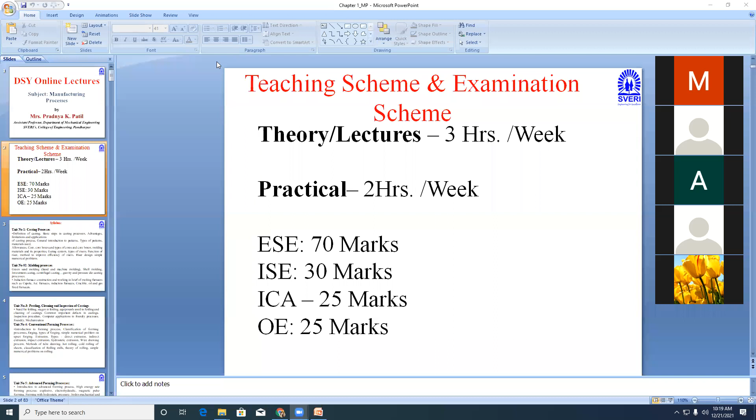Next, we will move towards our subject. First, our subject name is manufacturing processes. You have already learned about manufacturing processes in your diploma second year. Have you learned this subject in diploma second year? Some yes, basic part ma'am. Okay, so you are aware about manufacturing processes.

In this subject we have to cover 6 chapters total. Our teaching scheme and examination scheme will be theory 3 hours per week lecture, and practical 2 hours per week.

And ESE, what is meant by ESE? ESE is nothing but end semester examination. That will be 50 marks, but that 50 marks will be converted into 70 marks in online exams. If your exam is online, your paper will be 50 marks, converted into 70 marks. So how many marks will the examination be? 70 marks.

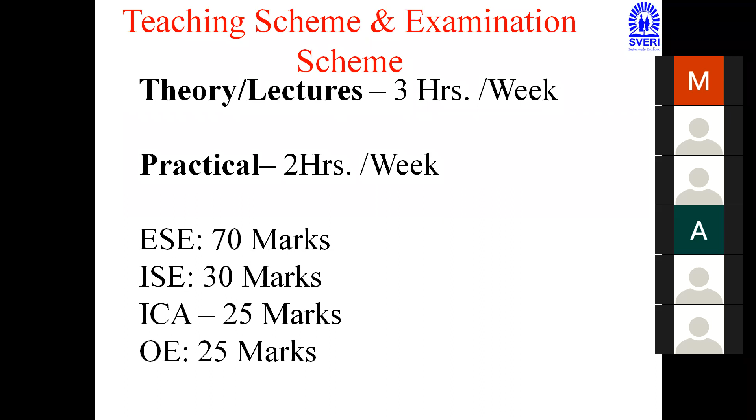Next is our syllabus. We have to cover 6 units total. First unit is casting process. Second unit is molding process.

In the first unit, casting process, we have to see the definition of casting. What is the actual definition of casting? What are the steps in the casting process? What are the basic steps required for that casting process? We have to learn that also.

And what are the advantages, disadvantages or limitations and applications of that casting process? So first we learn casting, next the basic steps of how to do that process, and then the advantages, limitations and applications of the casting process.

Next, general introduction to pattern. Have you heard the word pattern in second year? Have you learned what is meant by an actual pattern? We will learn about the types of patterns, the types of material used for pattern, what is meant by allowances, what is meant by core, what is meant by core boxes, and the types of core and core boxes in the casting process.

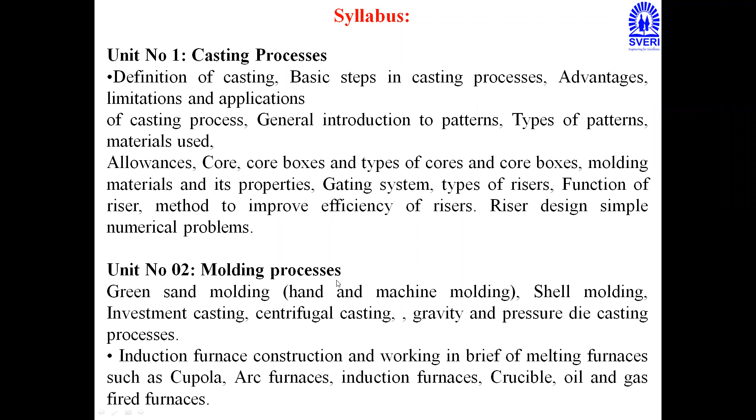Next part is unit number 3, fettling, cleaning and inspection of casting. What is meant by fettling? We have to remove the unwanted part of casting. That is nothing but fettling.

Cleaning, you know what is meant by cleaning. And inspection, we have to inspect that object or product in all aspects, that is specification, diameter, and all finishing. In every aspect, what you have to do is inspection.

So what is unit number 3? Fettling, cleaning and inspection of the casting. Next, in that, need for fettling. What is the requirement or need for fettling? Stages or steps in fettling.

Equipments used in fettling and cleaning of the casting. Which equipments are used in fettling and cleaning of castings? We have to see this in unit number 3.

Common important defects in casting - this is a very important part in unit number 3. Defects in casting, and inspection procedure. What is the inspection procedure?

Computer application in foundry process. What are the applications in foundry process? Computer applications in foundry processes - what fettling and cleaning computer applications exist in foundry processes, and how does mechanization work? This is what we have to see.

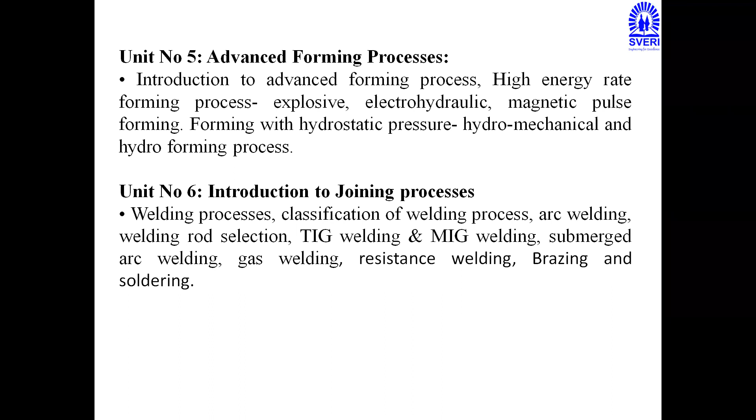Yes ma'am. Okay, next is internal continuous assessment.

Next part is internal continuous assessment, ICA. So in that we have to see 8 experiments, total 8 experiments are there.

So first is design of pattern and core for a simple component.

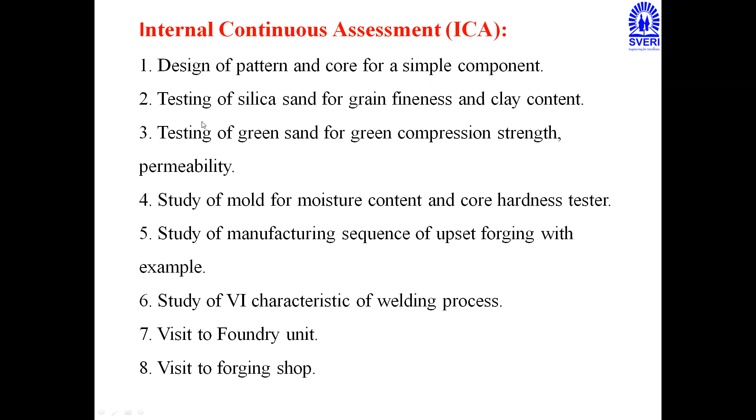Next part is the textbook. Please take a screenshot of the textbooks. I will give notes, but if anyone wants extra material, you have to learn from these textbooks. Please take the screenshot of these textbooks or write down the textbook names.

Heine, Lopar, Rosenthal - Principle of Metal Casting; N.D. Titov - Foundry Practice; P.L. Jain - Principles of Foundry Technology; P.N. Rao - Manufacturing Technology Foundry, Forming and Welding; and Production Technology by P.C. Sharma. These 5 textbooks are there in our library.

So if you want, please take it from the library, or many ebooks are there, so you can download from Google. Choice is yours. Have you taken the screenshot of the textbooks?

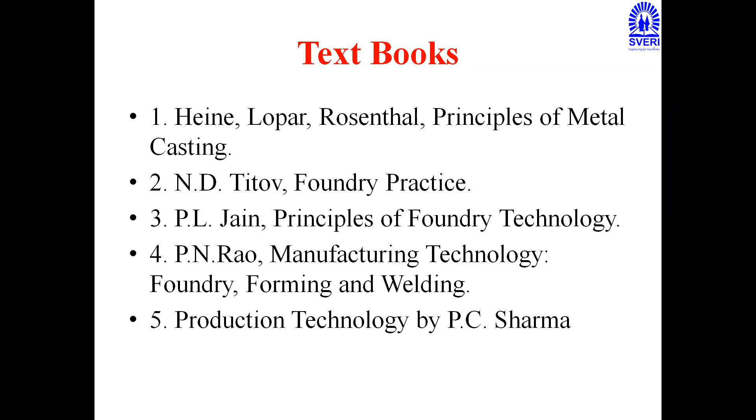Yes ma'am. Next, about the manufacturing processes - who will tell about the title of the subject? What is meant by manufacturing, and what is meant by processes, or what is meant by manufacturing processes? Anyone, what is the definition in your mind? What is the actual manufacturing processes? Anyone?

Our session will be interactive, not a one-way session. It means just me reading and you listening, or I don't know if you are even listening or not. So please unmute yourself when I am asking a question. You have to unmute yourself and give the answer, Ma'am.

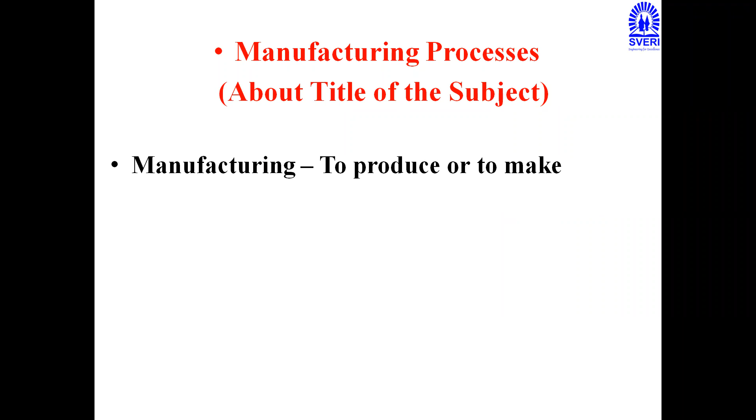So what is meant by manufacturing? To produce or to make something. To produce or to make something is nothing but manufacturing. We don't know what exactly, but we have to produce something or make something - that is nothing but manufacturing. And what is meant by processes?

One method or way of doing. To produce something, to produce a thing, what method do I need for that, or what must I do for that - the way of doing is nothing but the processes. So to produce or to make is nothing but manufacturing, and processes is nothing but the method or way of doing - for example, suppose your project is to create some model from it.

That is nothing but manufacturing - you need to make some model. And to make that model, you have to define one process or methodology - in your words, that is nothing but a methodology. So processes is nothing but method or way of doing. It means I have to define what is the way of doing that project, or what is the methodology for doing that project - that is nothing but the processes.

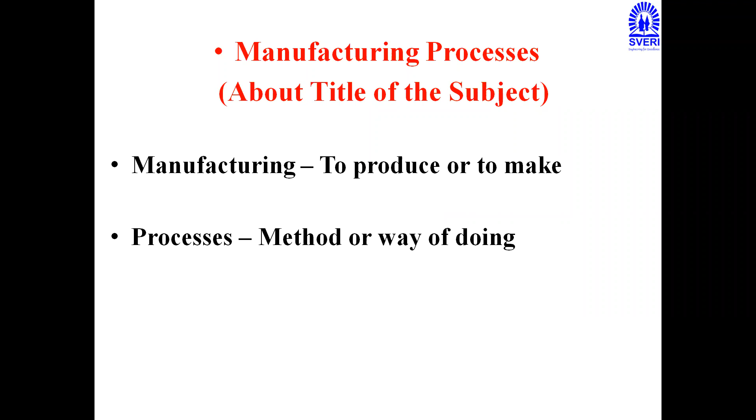Understood what is meant by manufacturing processes? Next is the title of the subject. Next part is the central idea of the subject. What is meant by central idea of the subject?

Now you have seen what we did. In this subject, how many units are there? 6 units, and the scope of the subject is producing different components by various methods. We are using various methods. So in this subject we have to learn the casting process. In the central idea, what do we learn? Casting process we have to learn. Second we have to learn.

Who will tell the 6 chapter names? First chapter, what is the name of the first chapter? Anyone? Casting process. Second, molding process, third, gating system. Sorry no, gating system comes within casting processes. Third chapter: Fettling, cleaning, and inspection of casting. Very good, fettling, cleaning and inspection of the casting.

Fourth, conventional forming processes. Very good. Next, advanced forming processes. Next, introduction to joining processes. Very good. These are the 6 units, and this is the central idea of the subject. You have to learn the 6 units, and what is the scope of those units, what are the objectives of those methods, chapter by chapter. Which objectives do we have to learn in manufacturing processes? This is the central idea of the subject.

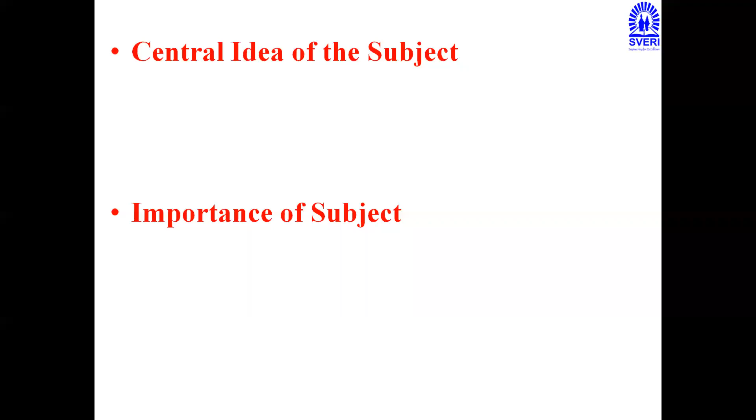And this is manufacturing process, topic 1, casting processes. So anyone, what is meant by casting process? Anyone, please give the answer. What is meant by casting process? What do we do when we do casting? If you know, please give the answer. What do we do when we do casting? Anyone?

Ashok Pawar, are you hearing? Ashok Pawar, are you there? What is meant by casting? What is meant by casting? Please unmute yourself. Yes ma'am. Do you know what casting means? Casting... just 5 minutes before I already gave one example of casting. So what is meant by casting?